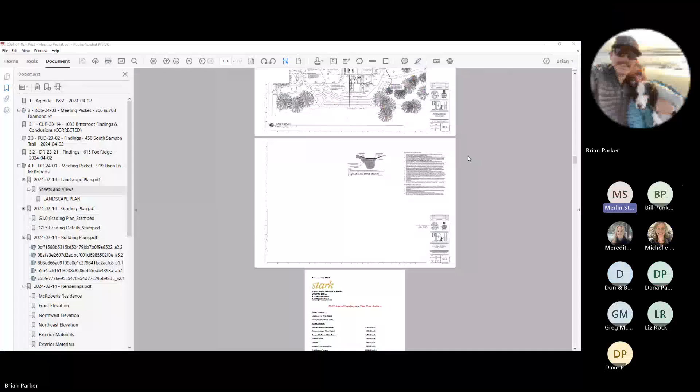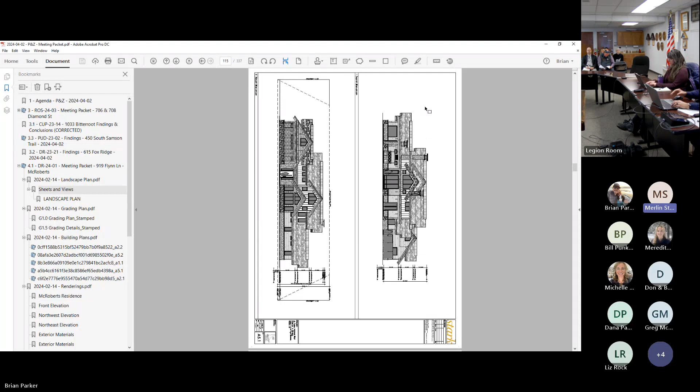We did get comments back regarding the double driveway that we had proposed for the house, and have no problem doing a single driveway into the house. We would like to do minimal landscaping around the house to keep the surrounding area as natural as possible. The only thing we may have is a path leading over to Ponderosa Park. As far as grading goes, I think we've complied with most everything on your grading requirements for the house, and we've also shown infiltration areas for stormwater, as well as snow storage for the lot. I know that there were some calculations missing, and for sure we'll get those to you by the time of building permit. I can't think of anything else right now. Do you have any questions? Commissioners, any questions for Merlin? Okay, thank you, we'll go on to staff report.

Chairman Lyons, this is design review 24-01, 919 Flynn Lane for a single family residence larger than 5,000 square feet. The application was submitted on February 14th, noticed in the paper on the 14th, mailed on the 15th, and posted on the 15th. You guys are going to make a decision on this tonight, theoretically.

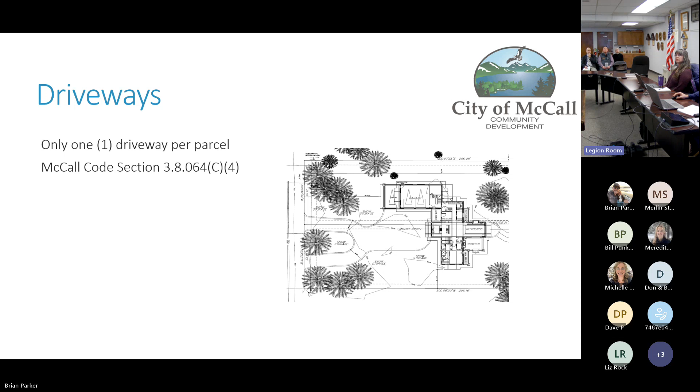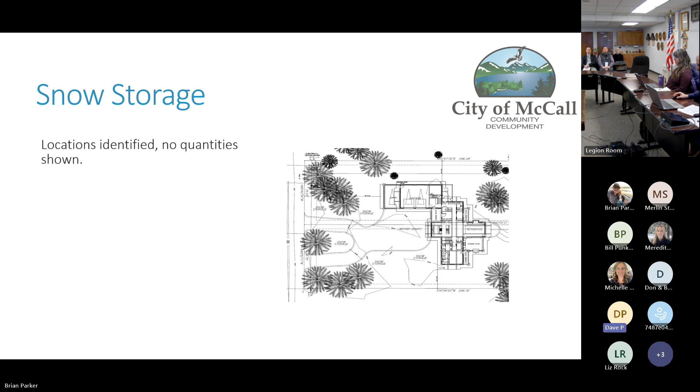From my discussion, there are, like the applicant stated, 2 driveways shown on the site plan. We generally don't allow that unless there's a very good reason to do so. There's conditional approval to remove that. There's plenty of snow storage labeled on here, but they don't actually circle it anywhere or identify the quantities. I'm confident it can work, but they should do the exercise. With that, I will stand for any questions.

Right, commissioners, if any questions for Brian on this one? It seems pretty clear. Yep, a lot of space, extra space. It's not anything too tight, so.

Okay, Morgan. Hello, commissioners. So I only had a few comments on this application. They will need to upsize the existing meter pit that is there. They have a few options for their meter pit, so it's just figuring out if they're going to re-tap the main for a 1-inch meter or use the dual 3/4 inch meter that's up to the property line. They have either option, so it's just figuring that part out on the site plan.

They did submit draft stormwater drainage reports, and it looks like it'll comply with our city drainage management guidelines. There's a lot of room to work with there. There's just a few items that need to be addressed before it can be finalized.

A similar comment to Brian's, just to update the landscaping plan to show the 1 driveway entrance on Flynn Lane. I believe it's on the engineering plans as 1 driveway, so just making it all consistent. And then just making sure their driveway detail matches what we have for our standard details. Nothing too major on my side.

Okay. Commissioners, any questions for Morgan? Morgan, I'm assuming that sizing the water meter and the drainage plan is part of the final engineering approval and the conditions? It is. Any other questions for Morgan or Brian at this point?

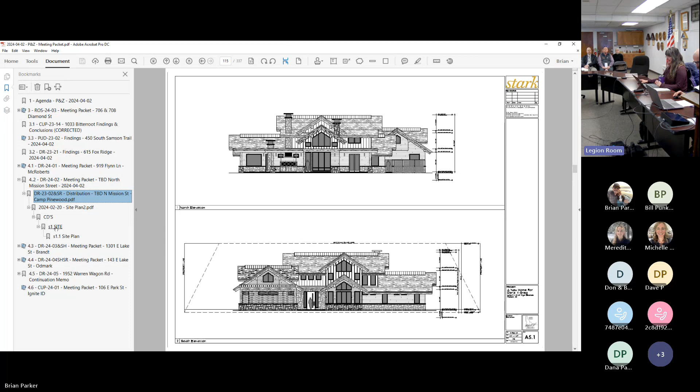I am Kyle Mashik, I'm the Operations Director of Camp Pinewood, and I want to bring to you the Maranatha Activity Center. Their proposed building is a gymnasium, consisting of a building 130 by 60 feet. The gymnasium size will be 100 by 60 feet, with the front 30 by 60 to be an entrance with bathrooms, a nurse's station, coffee bar, and things like that to be added. They are not in the plans because we haven't got that configured yet.

We're wanting to build the shell of the building and the gymnasium currently. We call it the MAC, the Maranatha Activity Center, and it will be an athletic event center providing activities such as basketball, volleyball, pickleball, indoor sports, as well as meeting spaces for not only our guests at camp but also the community. Under our nonprofit status, we are open for educational, religious, or scientific purposes, or any nonprofit activities, allowing us to extend the open times of this building to community activities. Since McCall is in need of large venue areas such as gymnasiums, we thought this would be a good benefit to the community as well.

We are planning a 5-phase project; this is the first phase. We have to build each phase to be complete in itself, with additions to follow. That's why the first phase will just consist of the gymnasium and the entryway with the bathrooms.

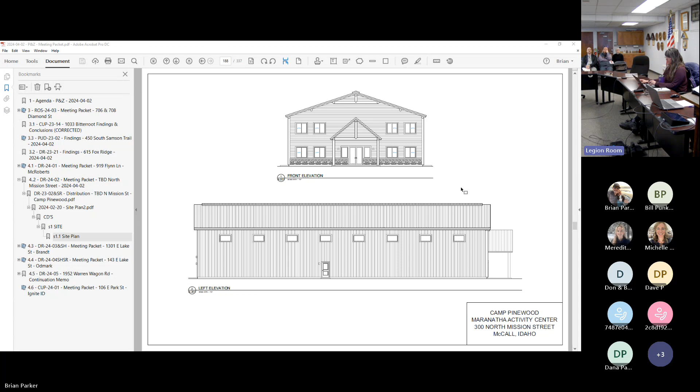It will consist of a metal structure, metal framing. Our plans are to have R&M Steel out of Caldwell construct this building. You can see a building similar to this in Donnelly at Shadow Bible Camp—theirs is a little smaller, but consistent with what we're planning to build. The east facing side of the building will be enhanced with natural elements, such as material from trees removed from the property where the building will be located, as well as some natural stone, artificial stone, and like materials on the east face of the building.

Because the hill this will be built on will have to be leveled, there should not be any need to change the drainage from the building, since it will basically take the place of the hill. The drainage will be a natural flow consistent with our 2016 proposal. However, we will have to enhance some of the impact areas before it reaches the river, to keep sediment from settling, which haven't been improved yet—those will be improved with this project. All the snow will be retained on site, and that, I believe, is what I have for a presentation.

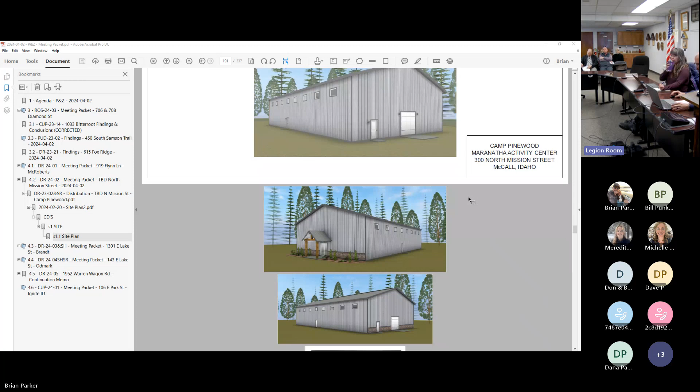Could you pull up a map and show exactly where it was planned? I wasn't quite sure on the maps. It was someone's shop and different things, but I didn't see exactly where the gym site was. I think I know, but if you could point out kind of where it was planned. Yeah, currently we have a shop right here.

This will be 40 feet behind the shop. And then in our 5th phase, because we'll have to build a new shop, we'll remove that shop, put a new shop in, and then this will become additional parking for that facility. The one straight above it is right here. This is the new one, not the activity building.

So it's going to face Mather? Or we're gonna face Mission. Mission, I mean it's facing Mission. So the front of it's Mission. So the sides are within the building. Our additional phases will be off to the side, both sides. We won't be putting any wood siding or anything on that side of the building at this time, because we're doing additions to the building in the near future.

And then you're just doing bathrooms right now, but you're good with the hookups with the sewer district? We actually have been planning to upgrade to a 2-inch line. We currently have a 1-inch line because we have plans for 3 large cabins in the near future. We're currently needing to go to a 1.5-inch line. This will keep us within a 1.5-inch meter, but if we add another cabin, it'll put us into a 2-inch meter. So we thought we should just go to a 2-inch meter right off the bat.

For the water, but you're good with the sewer district with the hookups, you've got everything you need? Yes. With the sewer district, there's the main sewer line right here. So we will be able to come from the south side of the building to that main sewer line, about 600 feet.

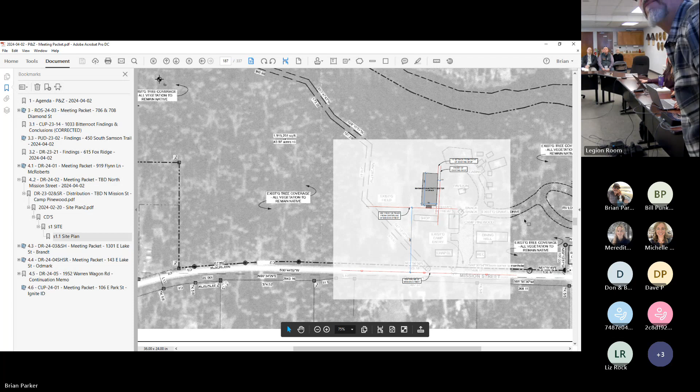This is David. Your drawings show a new driveway coming off Mather. Is that a future phase? No, this is already there. This is an old drawing of what we added to this. So we put that onto that drawing. So that is already there. Mather is completed.

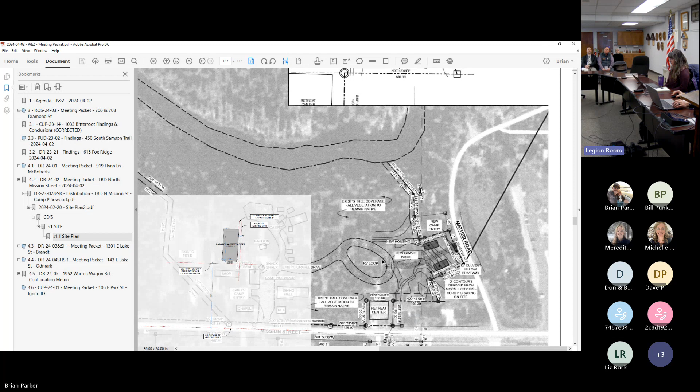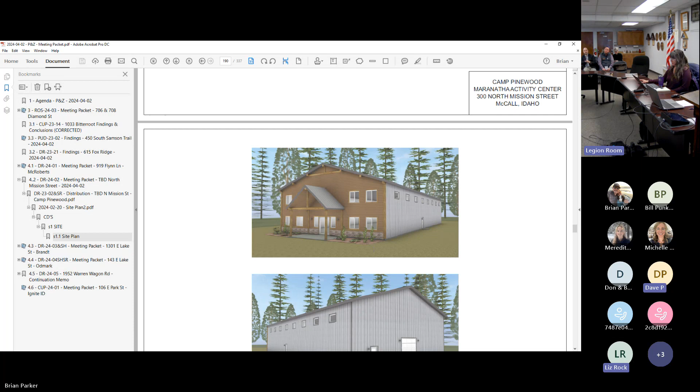Hey commissioners, any other questions for the applicant at this time? Yes, I had a question about parking. I know you mentioned there's a future plan of moving the shop or replacing it and changing out the parking. But for this first phase, what's your plan for the parking?

There is a large parking area to the northeast of this building, and that's an area where we plan to build cabins. So we will have to put the parking in front of where the current shop is at prior to building those cabins. That's why that will fall into that phase, because we have a large parking area now, but it'll need to be moved when we start into those phases. Gotcha, I'm tracking. Thank you.

Commissioners, any other questions? You mentioned that other community partners would be able to use the facility. Have you communicated with Parks and Rec?

Yes, we actually had Mike Wolf out and we walked the project with him, walked the property to talk about the trees that'll be removed and the impact on the community, as well as the possibility of using this facility during the week when we don't have guest groups at camp. He seemed very excited about those possibilities.

We also have one of our staff's spouse who is an assistant teacher at the school district, and the teachers and principal are very excited about having another venue in camp where they could use it. I've also talked to an Association of Christian Athletes director in Boise this week, and he said if they had one more facility here, they would be able to bring some athletic camps to the community, having multiple venues to do those. So he was excited about it as well.

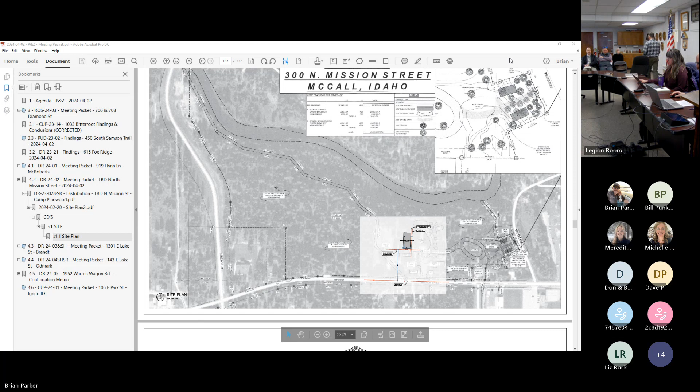DR 2402 and Scenic Route 2402 for TBD North Mission Street for a new gymnasium at Camp Pinewood. The application was submitted on February 20th, noticed in the newspaper on the 15th, mailed on the 19th, and posted on the 15th. You guys are the deciding body on this application.

Hearing and heard from the applicant and engineering. Then there'll be opportunity for public comment, then additional information as needed. Close the public hearing, deliberate, and then make a decision.

This application is for a gymnasium facility of approximately 7,800 square feet, located adjacent to the North Mission Street scenic route. It is substantially set back from that, so not likely to impact the visual quality of the scenic route, but it is there.

It's currently zoned R8. The future land use plan is medium density residential. Again, it's generally in conformance with the comprehensive plan, matches future land use, and a gym, a recreation area facility, is identified on their master plan associated with CUP 17-05. It is at a different location - I'll get to that in a little bit.

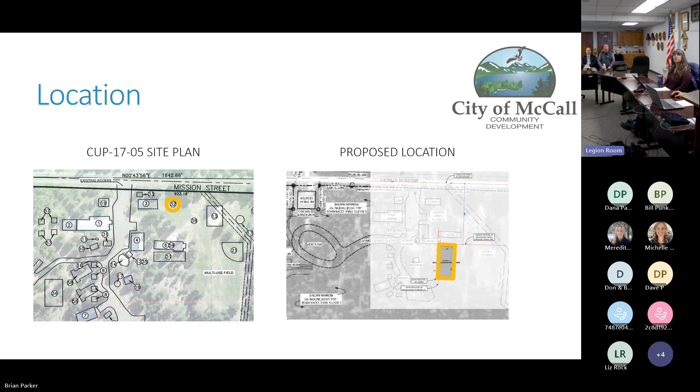Okay, so the one item of staff analysis, as mentioned, the master plan for this camp shows the recreation facility closer to Mission Street. In their planning for this, they determined that setting it back behind the shop on top of the hill was a better location. Seems reasonable and not a substantial enough modification to warrant changing the whole master plan. Generally in conformance with their master plan. With that, I will stay on for any questions.

Commissioner, do you have any questions for Ryan? Okay, Morgan, great. Hello again.

So for this one, I have been working with Kyle quite a bit to figure out the water infrastructure, the water meter sizing. We've come up with a 2-inch meter would probably be best to future-proof this for the future phases, so they don't have to keep going back to the main and upsizing. So we're working on that. I just needed a few more documents from him and I got those in an email. And then they have their stormwater report that was prepared in 2016 that was approved.

And then I just had some additional questions as it relates to this project and some of the grading around that building. That was really all I had, just to make sure it all matches with what's been previously approved.

Commissioners, any questions for Morgan? Not for me.

Okay, with that, we will go to the public comments. Is there anybody online or on the phone that wishes to comment regarding this application? If you're on the phone and you're muted, you may need to hit star six to unmute yourself.

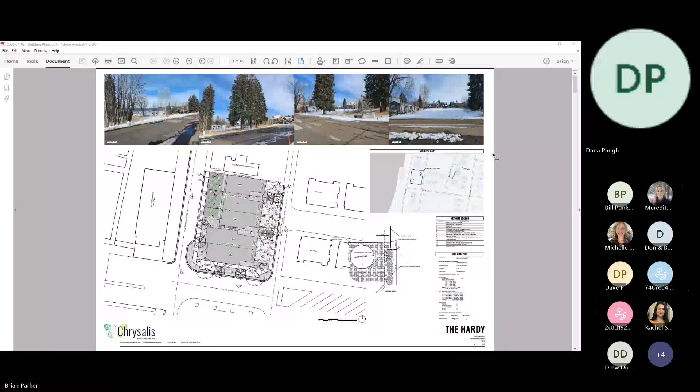Mr. Chairman, members of the commission, we're here today asking for design review and shoreline review of 5 lots between Lake Street and Mill Street, adjacent to First Street. On these 5 lots, we're planning a mixed-use townhome development where the retail spaces would face towards Lake Street, basically facing the marina, which is the lower part of the site in terms of grading. On the upper 2 floors above the retail spaces, we would have single-family residences — 5 retail spaces and 5 residences.

In terms of grading, Mill Street is the high side of the property and Lake Street is the low side. We're anticipating our residential driveways being accessed from Mill Street. Those units would carry all the way through the building, so you'd have the front doors along Mill Street, and then patio and living spaces as you move towards Lake Street.

Our height all complies with the limitations within the zone and the shoreline area. We are fully compliant with all the setbacks. We've worked fairly extensively with staff to resolve how to make these units nice and interesting, providing a pleasant and interesting architectural aesthetic while still being able to capture the views of the lake and whatnot.

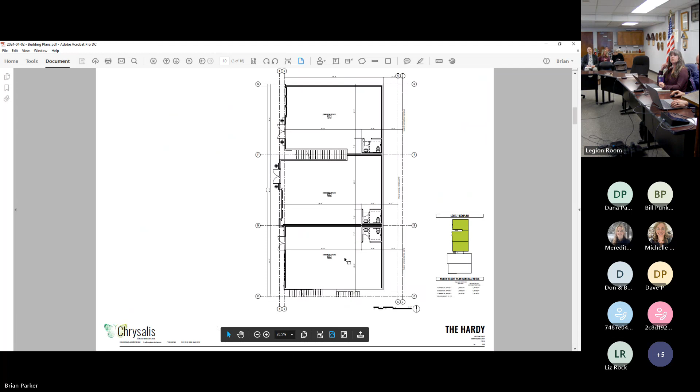So with that, I stand for any questions. I think we've basically complied with all the requirements, worked with staff to try to address all the zoning issues, the setbacks, and the building heights. And we do have a report from engineering that we would end up working through as we get to the building permit.

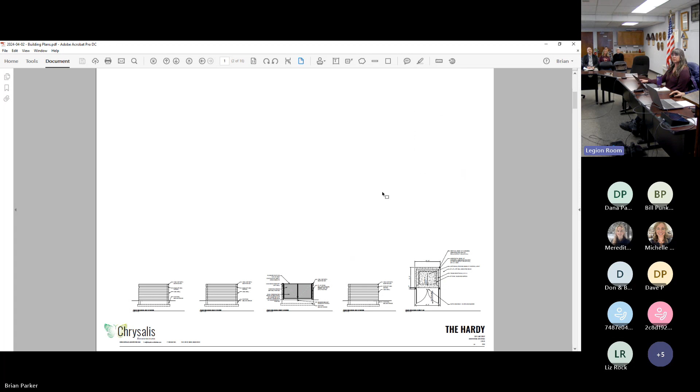Quick question on the upper level where you have the buried propane tanks. It appears, at least in the drawings, you just have the regular cap over them. Is there going to be more to protect it? Because it appears to be right next to and in between driveways, for somebody to either plow into them or drive into them. So the fueling tanks are actually on the lower level. No, not those tanks — the propane tanks that originally had above ground and are now below ground on the driveway side or the garage side, showing propane tanks for each property.

So these would basically be underground and within the landscape area. Okay, but they have the metal cap over top of them that they can open, and it appears pretty close to the driveways. Are you going to have more of something to protect them if somebody's plowing and they're over a little bit? I'm just thinking they'll get torn into. I think that's a good suggestion that we work something into the landscape, and if we need to introduce some wall or barrier there to protect that, I don't see any reason why we couldn't incorporate something along those lines. I can just see people not paying attention and running into them. Even though the tank's safely below, it still could cause issues. Definitely agree, yeah, but we can absolutely incorporate something like that.

What's the plan for where the actual fuel tanks for the marina are? What is your plan to do on top of those? So right now, according to our lease agreement and the way the easement is structured, the concrete has to remain. We can't do anything artificial or superficial over the top of that without agreement between the tank owner and ourselves. So in the short term, we would anticipate just leaving that alone as is, because we don't want to disturb it any more than it needs to be. But around it, we would try to enhance that area with paver systems and things to try to integrate the sidewalk with the adjacent grades and the building elevations.

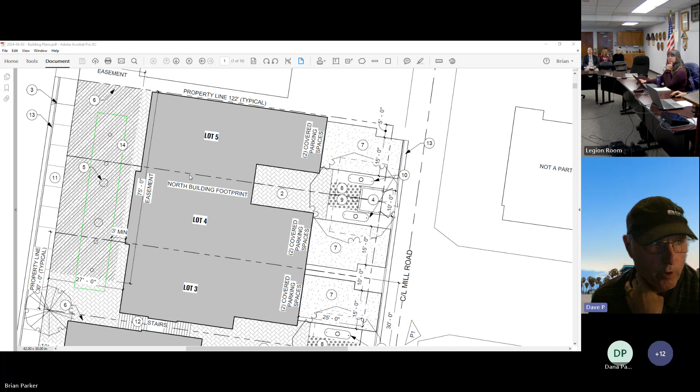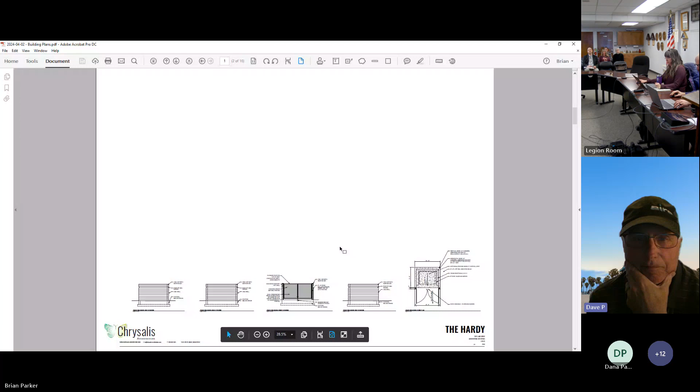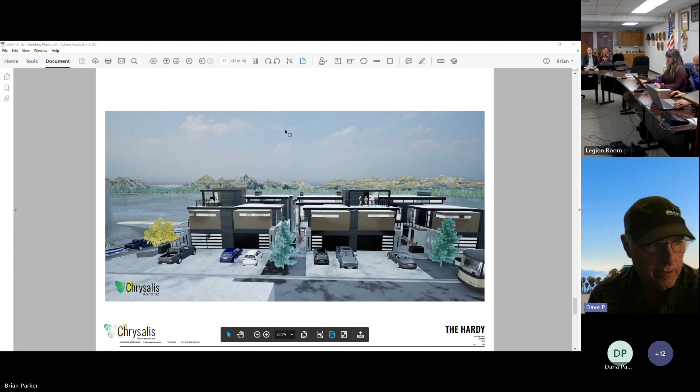This is Dave. Your drawings on page 241 show a plaza over the top of those fuel tanks along with parking. I question how you're going to allow a fuel truck in there to fill those tanks if you don't have some sort of working agreement with the owners. And then there's been a comment on the driveway on the farthest north. Do you have any way of remedying that?

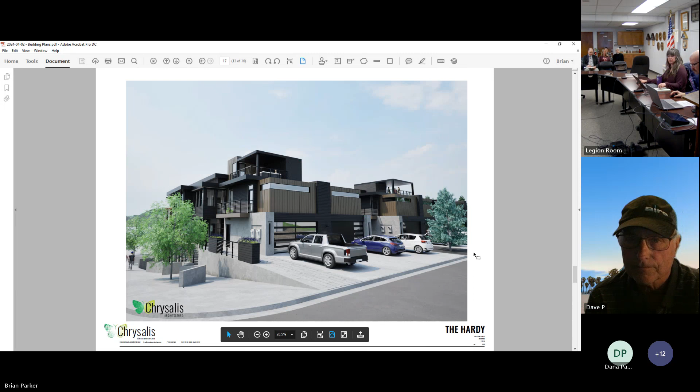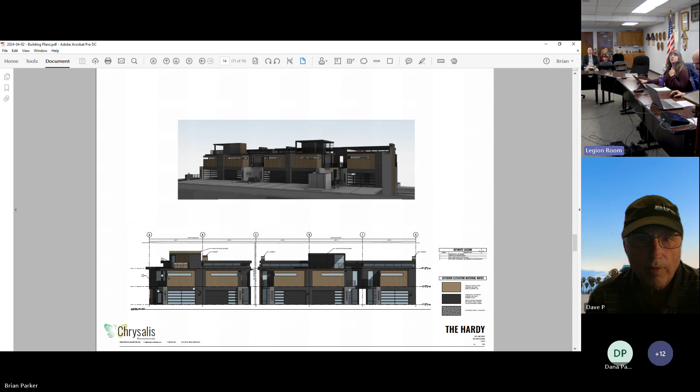Let's go to the image you might be referring to. It's a perspective. Basically, what we're showing is what we anticipate to be the inevitable long-term projection for that plaza. We understand there's going to be some time in between as to when those tanks remain and if they get removed, but this is what we envision for the finished version of the plaza.

In the short term, however, along Lake Street, there's parallel parking that's going to be provided, and that's where the discussion with the tank owner comes in - we would allocate a certain time compatible for both of us to figure out when those tanks need to be fueled. The proximity to those tanks and where that on-street parking would be would absolutely accommodate the needs of being able to fill those tanks up.

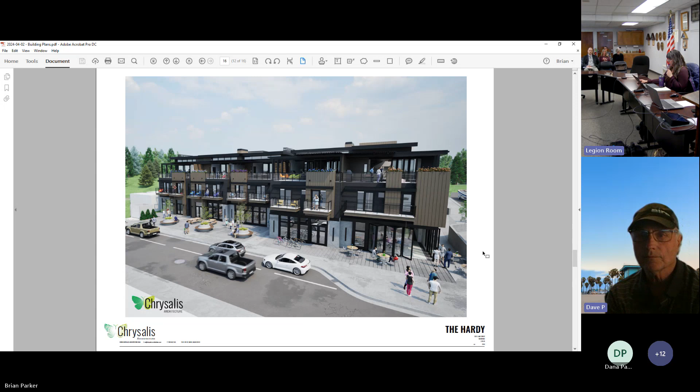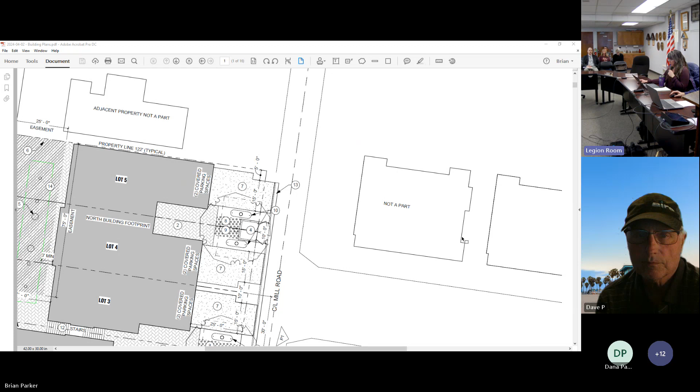And then, what was your question about the north side, Commissioner? The driveway on the farthest north appears to be too close to the setback. Who revised it? I think we have since revised that from maybe something you've seen that was a prior version. In one of our initial concepts, when we submitted the application, we had driveways that were a little closer together and didn't provide the necessary separation. I think we've since satisfactorily addressed that, at least in our workings with staff. So unless there's something I'm not aware of, I think we're okay meeting the code requirements with the driveway design as currently proposed.

Maybe Brian can comment on that a little bit. Yeah, we'll let Brian update us on that.

It's helpful to have drawings that are actually what you want to build sometimes.

All right commissioners, any other questions for Richard at this time? Yeah, I do have one. What's your plan for snow storage?

So in between all of the lots, we have designated the snow storage areas. And then I also think we're making some contribution to having it trucked off site. But we are allocating some of that snow storage on site currently.

Any other questions, Richard? It looks like... oh, go ahead. Your drainage basins are all on the Mill Road side, like water's gonna run uphill. How's that? How do you intend that to work?

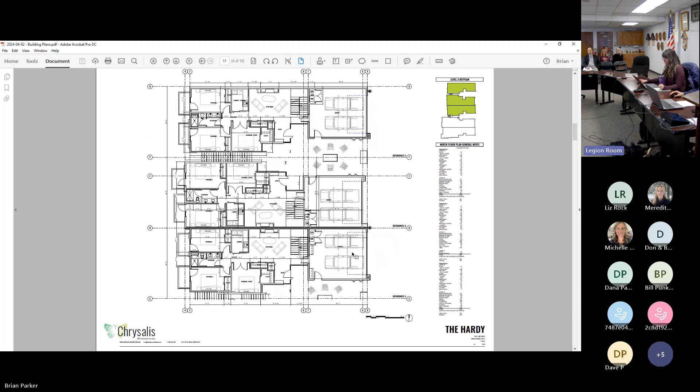No, Commissioner, actually we have two sets. We have drainage on the north side, on the Mill Road side and on the Lake Street side. So there would be some drainage on the lower level, really in the areas where the tank is not, and as we're providing the appropriate separation, that's really the intention for the pavers themselves, is that they act as a storm drainage and retention area.

But you're showing that over the fuel tanks again, right? Again, we're showing that in such a way that this is what we anticipate for the future, long-term vision. Right now, given that the tanks are there, we have enough area and we're using as much area as we can for the snow storage outside of those. So anything added later on would be over and above what would be required.

I guess I'm curious why you think the fuel tanks are going away. Well, there's a lease in place, and the marina might not always exist in its current situation. And even if it doesn't, our project has accounted for those tanks remaining in place outside of any of the planting areas that are placed on top of it in what would be our final version of the site. Okay, I really don't see the marina going away, but we'll let you go on with that.

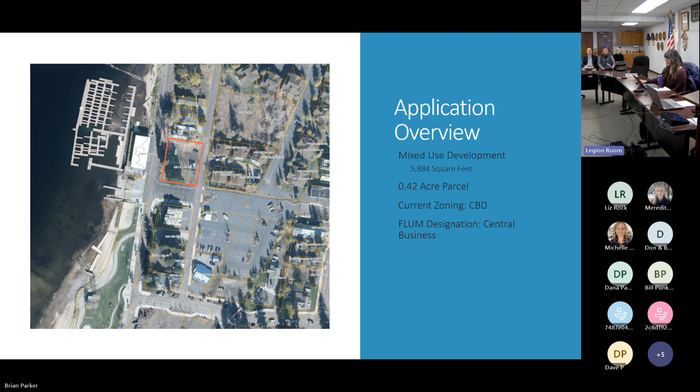The commercial zone has specific design review standards that we'll go through. It's required to be at a pedestrian scale. The buildings have variation in the wall planes. There are 2 different buildings. The larger building includes a stairway access point from lake to mill that will break up the facade a little further and keeps pedestrian scale.

Includes some balconies. There's quite a bit of variation in building materials. The larger building is set back relative to the other. I've been kicked out of the meeting again.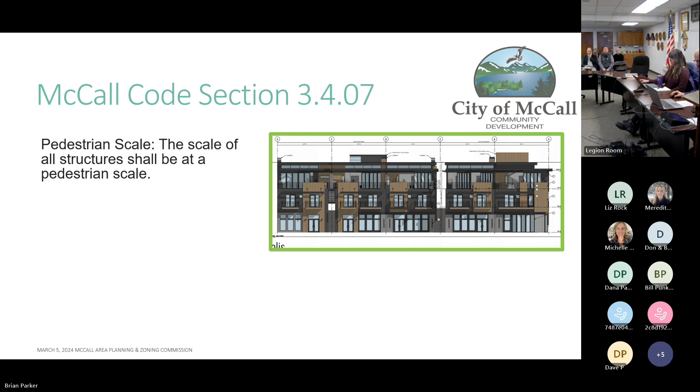And got pedestrian oriented street front, or storefronts, I should say. All the storefronts are less than 25 feet wide. There's one that has 2 storefronts adjacent to each other, roughly 50 feet worth of space. There's substantial glass on all the storefronts.

There's some obvious front doors of the buildings, particularly the ones that include the wood elements around the doors to highlight the entrance.

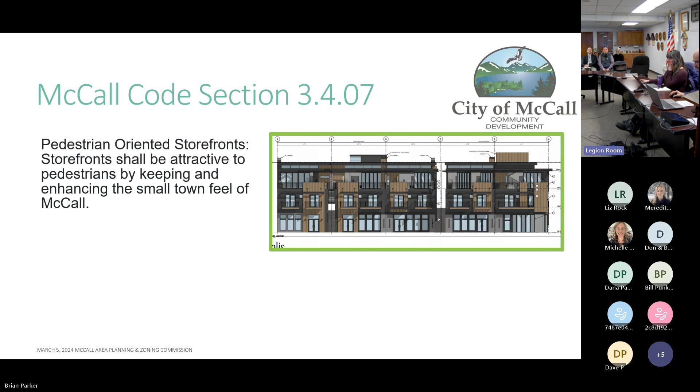The requirement is for styles consistent with the McCall area. This one is a little bit more modern, a little different style than what you would typically think of as a traditional McCall style. It does, however, incorporate substantial wood and stone elements into the design.

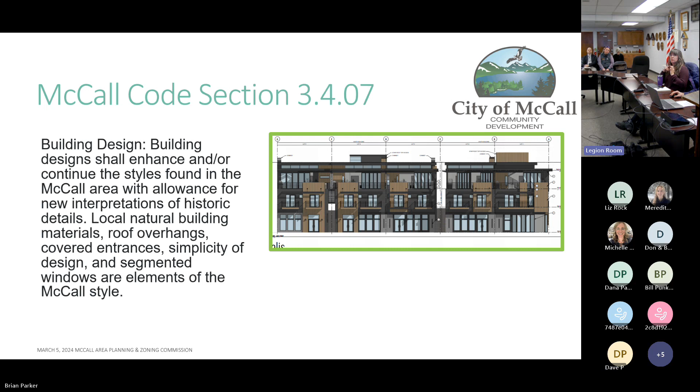Has covered entryways, balconies on the 2nd floor, a flat roof to retain snow. I think it's generally consistent with McCall style, although it is, like I said, quite a bit different than what you would typically expect. The snow country design again has covered entrances and a flat roof to hold snow. The actual snow load requirements are determined at time of building permit.

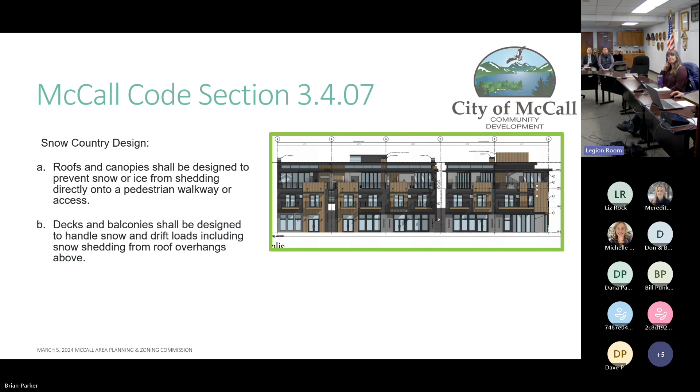There are no harshly contrasting color combinations or blank walls. So then the general design review standards, it matches the comprehensive plan, zoning, and future land use map. It's infill, it's mixed use, includes pedestrian improvements. Again, there's nothing that is likely to jeopardize health, safety, or welfare of the public. It conforms with applicable zoning requirements as conditioned.

The project will have no substantial impact on adjacent properties or the community at large. It is what has been envisioned for the downtown area for a good long while, and what was expected within the shoreline and environment zone. It will be unlikely to have unreasonable impact on visual quality or the water quality. It is an improvement on an unimproved dirt parking lot. It is not directly on the shoreline, it's set back, and stormwater management practices will be required to be followed.

As discussed earlier, the plans in your packet had the northernmost driveway right up against the property boundary. There's typically a 5-foot setback requirement. It appears they have made some modifications based on the plans presented by the applicant.

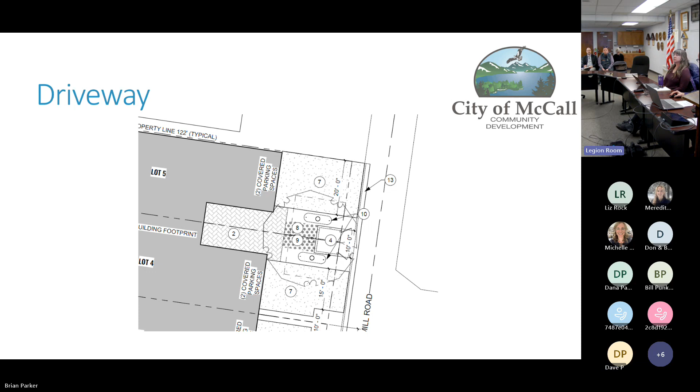Fuel tanks, as discussed, there's a 75-foot by 25-foot easement area for the fuel tanks. The building nearest is supposed to be set back a minimum of 3 feet from wherever the actual location of the fuel tank is, or outside of the easement, whichever is greater. We don't know the specific location of the fuel tanks at this point. We've been working with the building official and fire district to make sure that when it comes time for a building permit, those are located and the correct precautions are followed.

There is a condition of approval to develop an operations and maintenance plan between the developers of this property and the easement holder, which is Mile High Marina, so they can agree on how it would actually be fueled, what times of day, what street furniture and things like that can be placed on top of the easement area, and so on. I intentionally left that condition fairly vague. If there are specific items you would like addressed, please motion.

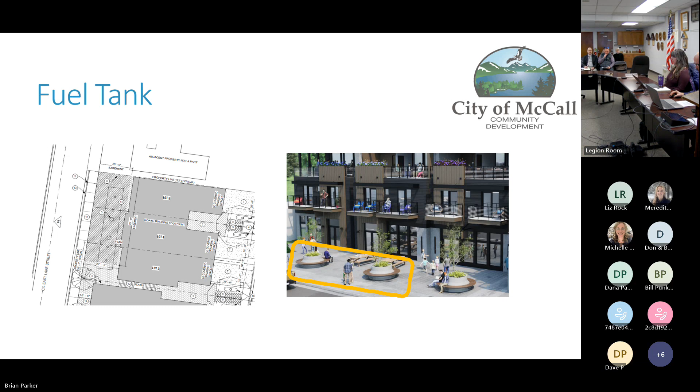The applicant has indicated that the original 5 parcels from the McCall first addition plat are still valid and that this has been combined for tax purposes. Entirely plausible - we just want to see a title report to verify that, or some documentation.

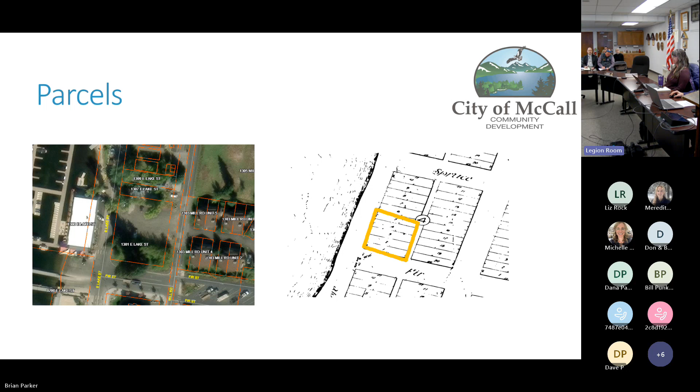Snow storage is required at roughly 2,500 square feet, and they have identified roughly 400 square feet - on these very dense types of developments it's just not feasible. We have options for them to provide documentation that it's going to be trucked off and stored elsewhere. So there's the condition of approval: they either figure out some storage on site or provide documentation that it is going to be handled elsewhere.

The bicycle parking, they have identified adequate short-term parking, but need to show 3 more long-term bike parking spaces. That I will stand for, for any condition or question.

I know they're doing the sidewalk there - there's several homes between that and the glass house. With that getting closer, is there any thought of doing any more along there? Yes, we have been taking these on one at a time and getting escrow agreements between individual property owners as they develop, or construction is up to the developer.

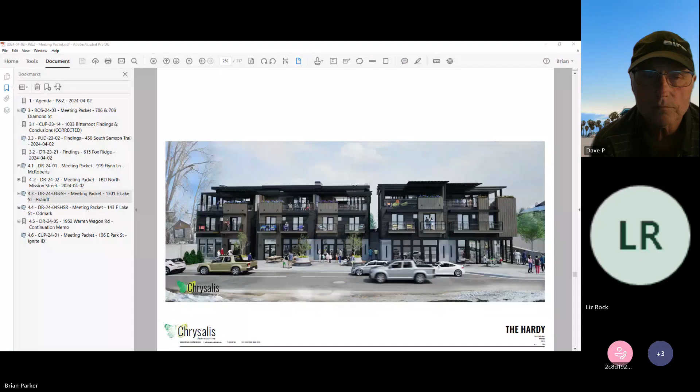The building height is the more restrictive of finished floor elevation or pre-construction grade. This flat dashed line is finished relative to finished floor. This sloping line is pre-construction grade. Gotcha. So there's a chimney here and then it's stairway access.

All right, commissioners, any other questions for Brian at this point? All right, Morgan. Well, before we do, sorry, I was late on the mute button. I have a very silly question.

As you can see in this elevation right here, they do have a sign. Does this application include that signage or would that be approved separately? That's a good question. I typically put in a statement that no signage is permitted with this application and will require a future sign permit application, but I failed to get that conditional rule in there. So they're adding that as well. Thanks.

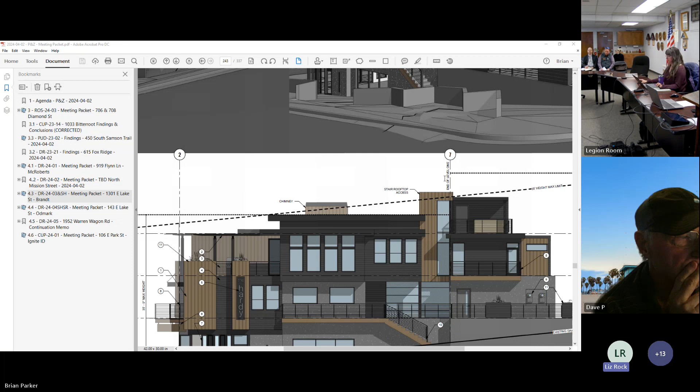But by not mentioning it and having no sign plan, there's nothing there.

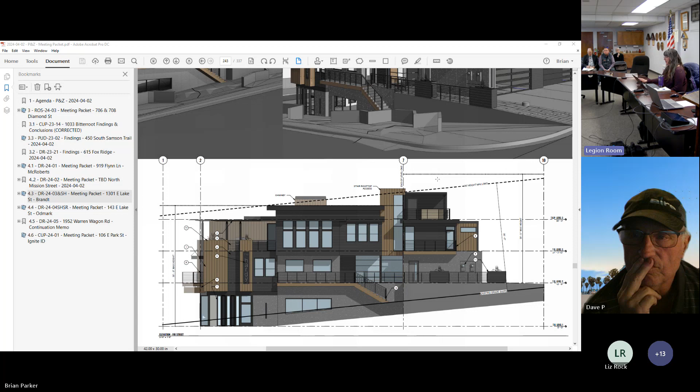All right, Morgan. Great. Hello again. So we've reviewed this application and I sent out my engineering review letter. It's about 3.5 pages of some items that we need to work through. There's 3 major items that I think are kind of risky to get entitlements before, just like some of the other projects that we've seen that are larger in scale.

So the hydraulic model hasn't been completed right now. It has been initially completed, but further input from the fire department and our consultant team is needed. The initial assessment does identify that improvements to the water mains will be warranted to achieve the required flows and pressures that we are assuming at this point in time. So that'll include building a main in First Street to connect Lake and Mill and upsizing the Mill Street water main, but that length hasn't been determined yet. So that's one of the inputs that I'm waiting on. But there will be some water improvements that need to occur.

They did submit a traffic memo and it's pretty general, but it's kind of hard to account for traffic impacts in a more urban area. That's our pedestrian zone for Lake Street. So we still have a few conversations, I think, on that and regarding Mill Street in general and its condition and how it'll fare through construction of this. And if they're building water mains, what that looks like for that pavement section.

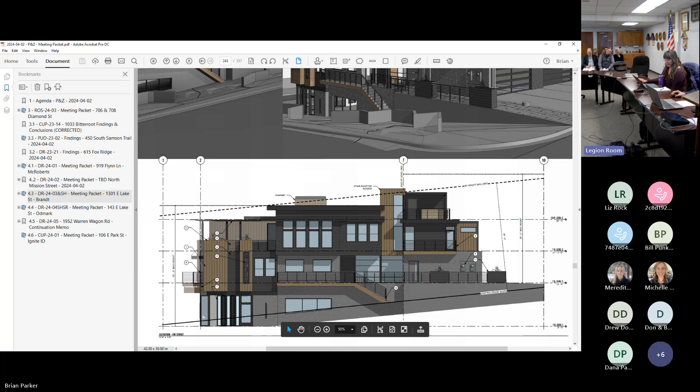From what has been submitted, the stormwater design does not meet our drainage management guidelines at this time. Commissioner Petty pointed out that there's some drainage basin items, and some of those were part of my concerns as well. There is a large drainage basin on the east side of the property along Mill Street, and the narrative explains that it's the roof drains that'll drain into that basin, but it does not propose pre-treatment for the drivable surfaces or the plaza areas. And it's just to follow the historic flow, which we're not okay with right now. It needs some kind of pre-treatment because it's so close to the lake, that storm system, and verifying the storm system has capacity for these increased flows.

This is also a pretty large drainage that comes through here. It's basically all the drainage you see outlets here. So confirming that it's sized properly for that acreage. Those were a few of my high level comments, but I think it can all be worked through. But just stating it's risky on their end to get some entitlements before having some of these larger picture items considered and figured out.

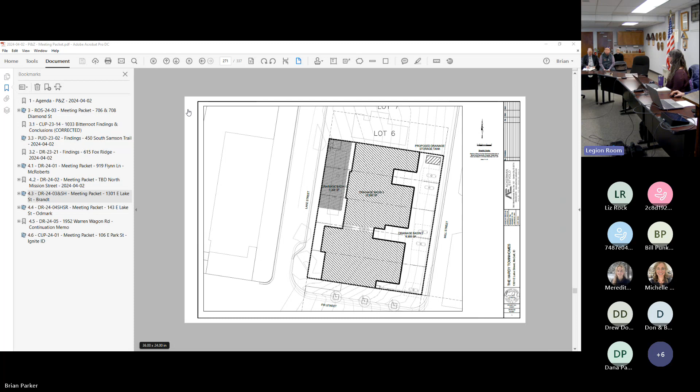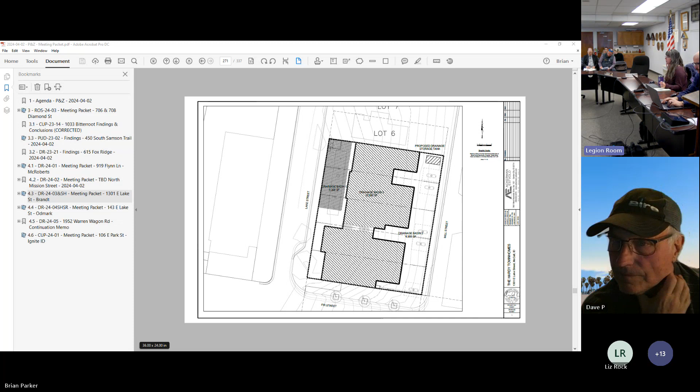I noticed we had some kind of late comments coming in from the fire department that required a sprinkler system. Yes. So that'll be part of that hydraulic model, identifying what they need for those pressures and flows for that internal fire suppression system. And that's in my report also. And then verifying with the fire department if 1,500 gallons per minute from the fire hydrants are sufficient, or if it needs to be 2,500 gallons per minute for the mixed use. I know for some of the mixed uses, we try to aim for that higher gallons per minute just so that there's more water and pressure available for these projects. And just verifying what they're comfortable with, since there are quite a few hydrants around.

Pull it out of the... Yeah, and they'll have some fire suppression on the interior, so figuring out that balance and what that'll look like in the water model. They did have in their plans fire sprinklers already, correct? I thought I saw that in there. Pretty sure I did, didn't I? Yeah, that's what I thought. Okay, yep, but just getting those flows and pressures confirmed, to make sure that they're supported adequately.

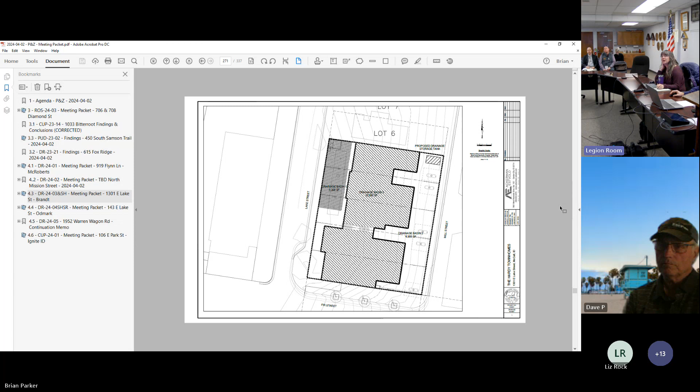You mentioned that the drainage from Woolley comes through here. Where does that go, and how does it reach its outlet? Do you have an aerial map, like a satellite view? Just generally, is it north of the property?

I believe it starts in Spring Mountain Ranch and comes down to Woolley, and then has that channel on the south side of Woolley that meanders to the north side on those undeveloped properties at Woolley and Davis. There's also a pedestrian pathway through there, which is also a drainage easement.

Brian's gonna pull up the stormwater layer. I just didn't know where the outlet was for it. So it's all connected there, and then we have a system of stormwater pipes through the improved First Street, Greystone Drive, and McCall Avenue. That stormwater pipe is connected on the north side of this property, which was one of my comments, to show that stormwater pipe.

So making sure it all meets the requirements of the drainage management guidelines. There's some outlines in there depending on the drainage size, how large the pipe needs to be, and what size of storm it needs to accommodate.

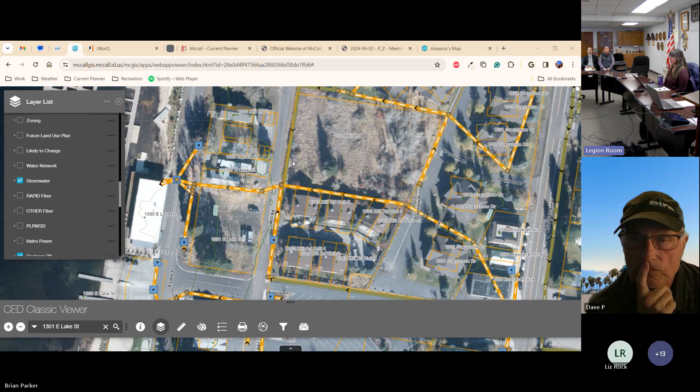And you guys haven't had those discussions yet, I'm assuming? Not yet. This is kind of a new area for traffic studies where it's built out, but more pedestrian focused, unlike other projects we've had in the past. Thank you.

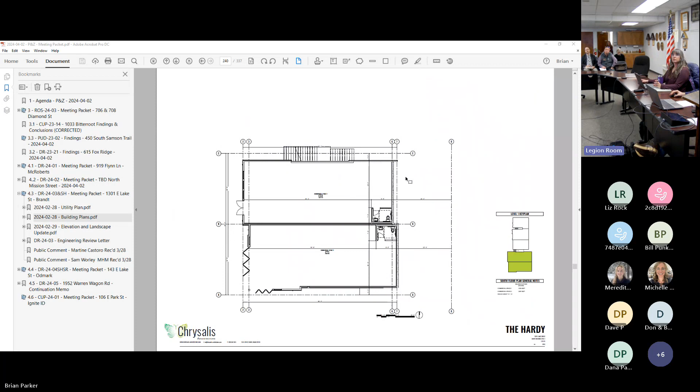I've only got 3 minutes. The other thing is on the shoreline environs, there's quite a bit written about not having wall-like structures, either from the water or for people on our side who have views of the lake or looking toward open space. On our side, we're looking at a wall of garages, the 2nd story, and then the 3rd story with stairways up. If there was some way to still allow them to build, but maybe make those stairways bigger or shrink the structure, it's very wall-looking. From our end with the garage, the views they have are up high, like where a crow would see it. If you're actually down where we are, these garage fronts are going to be quite oppressive and appear like a wall.

I think this application is premature and not ready, and my request is that you reject it.

One last thing for planners, and I know Michelle's on the line: Mill Road has turned out to be a fantastic pedestrian way. Right now there are no sidewalks, and that actually allows people to use it as a pedestrian way. They walk 3 and 4 across with strollers and bikes. It's a wonderful amenity because cars automatically slow down. As soon as you put in curb, gutter and sidewalk, that's the 2 feet allotted to pedestrians, and cars start speeding up. So as you're looking at Mill Road and parking, if you haven't spent time there in the summer, go hang out and see how people use it as a great pedestrian thoroughfare. I'd ask you to keep that in consideration as you look at plans for sidewalks. That's all - perfect timing.

Is there anybody else here in the audience who wishes to comment regarding this application?

Is there a last call for anybody online or on the phone who wishes to comment regarding this application?

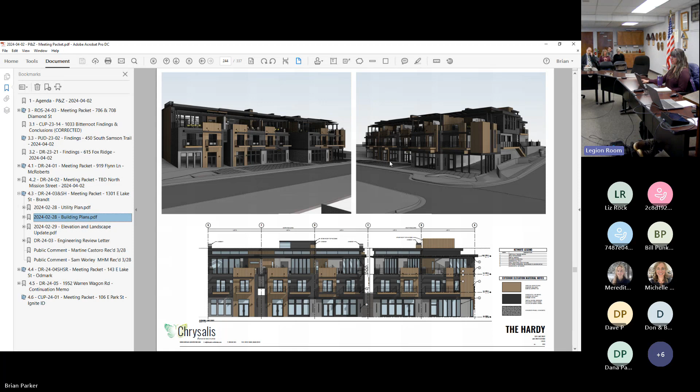On the residential side, on Mill Street, there was a question early on by Don Gray about the actual height. We've reduced the height along the Mill Street side because of the slope of the site. So on the low side of the site, the building appears taller toward the marina, but on the residential side, all of these are just above the 20-foot mark. There are some areas where the stairs, as an exception, allow us to extend above the 35 feet, but only by about 2 feet for the stair area. Everywhere else relative to the buildings is well below the 35-foot height limit on the Mill Street side.

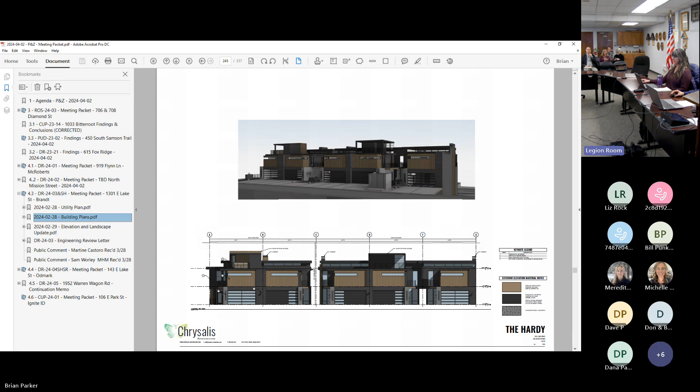In terms of access and parking on Mill Street, the intention is not to have any on-street parking on Mill Street. All the driveways and garages would accommodate the necessary parking for the individual residences.

As far as the traffic study, the point made by Morgan, I think, is an important one, because we have these conditions. If these conditions aren't met, then we don't have the entitlement. So allowing us the ability to continue working through some of the very specific things relative to studying access at the marina, those are expensive exercises that really are difficult to continue without knowing that we actually have a project to work through.

Understanding that we absolutely have full intention to comply with all of the engineering requirements, we think that the reality that we're providing a better system around this property as a result of this project should be commended, simply because we're making the system better with this project.

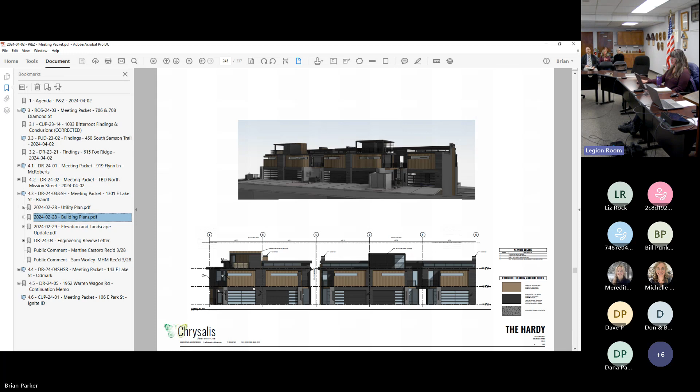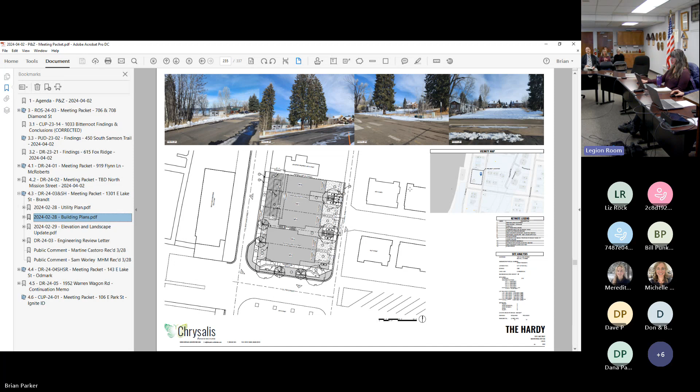As far as the exchange around the tanks, we know exactly where the tanks are. They're shown on our site plan. As a matter of fact, the tank as it's shown right now extends beyond the easement. If we so felt like it, we could ask them to remove that part of the tank. We're not going to do that, but the reality is, this is where the tank is located, and it's not within the easement.

We are providing all of the appropriate separations that are necessary for code requirements and regulations for construction around fuel tanks, and the structure is not imposing any additional impact to the tanks themselves. Again, we have every intention of working with the tank owner to make sure that that issue is resolved, but that's not the issue at hand as far as I'm concerned.

What we're here for is the design review portion, and making sure that we're requiring and addressing all of the engineering necessary to accommodate our buildings and our proposed design. With that, I would stand for any questions.

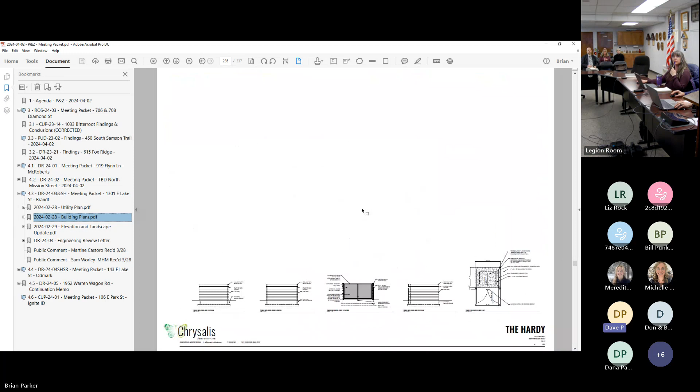Just to answer one of the public questions, I'm sure you're not anticipating any real curb or sidewalk along the Mill side at all. Yeah, there is. It's not just your driveways. It's curb and gutter, and then sidewalk through. So there is sidewalk along there. Okay, it didn't look like there was on the picture. Yeah, maybe a little bit of a curb, but not seeing any sidewalk.

No, you had it, Brian, back. Oh, so you have it on that, but not on the artist rendition or the picture. It might not have got incorporated into the rendering. But yeah, there'll be sidewalk around all sides.

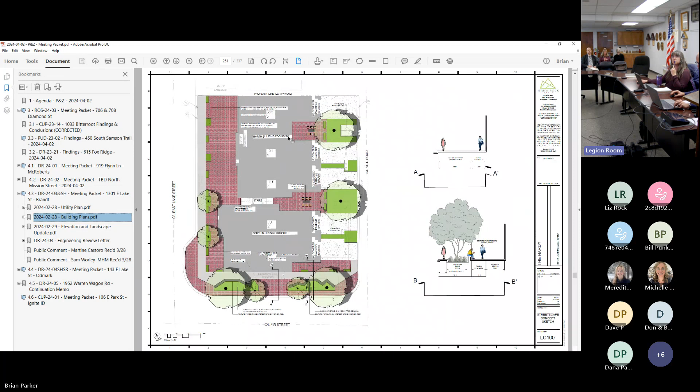On the tank, since you have the easement showing 3 feet from the building, correct, as far as the easement? That's right. So what's the distance from the actual walls of the tank to the footing? So we have a site plan with a little detail. Yeah, I saw that one there, but I don't see if it showed the actual distance from the tank. The way that I read it was that it was 3 feet from the tank, not 3 feet from the edge of the easement.

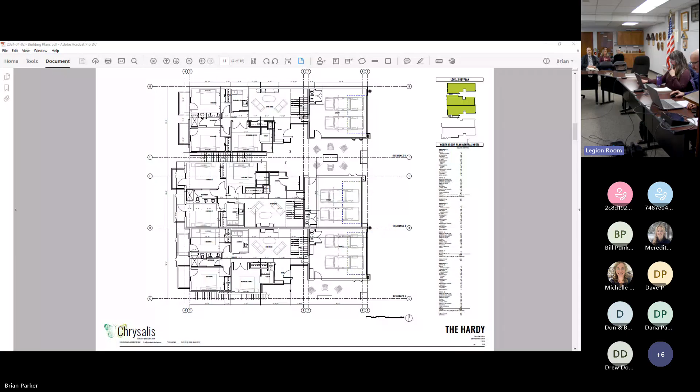We added a detail just to clarify this, Brian. So a 10,000 gallon tank is going to vary in size with diameter and length. This is generally considered the largest size for that gallon capacity. Right now, we have at least 6 feet. We have 5.5 feet to the sidewalk or concrete pad over the tanks. And we believe the size of that concrete is actually 12, so there's actually another foot from the edge of that concrete to the tanks themselves.

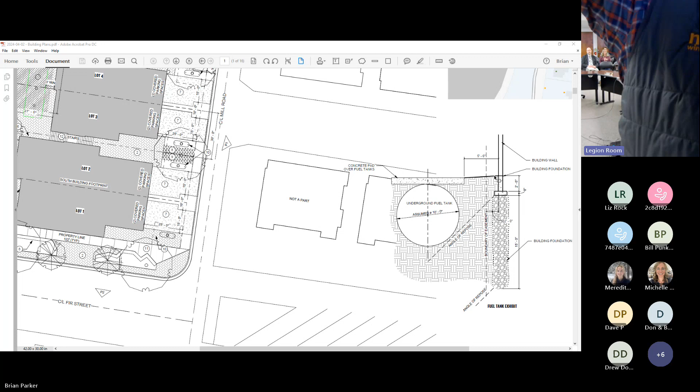The building structure is basically on geopiers, like structural sonotubes that go down into the ground to support the perimeter stem wall and footing. There are 2 conditions analyzed for the structure and the bearing capacity of the soil: from the point of the structure, there's an angle of repose, which represents the implied load of the structure on the soil. The load doesn't go sideways, it goes down at a 45 degree angle. So even in our worst case scenario, that angle of repose doesn't touch the tank. Anything above that line isn't impacted by the structural load of the building; everything below that line is.

So that diagram basically says exactly what I've been saying, that the structure doesn't really impose any additional load on those tanks.

Excavation will absolutely. What if that tank is 12 feet wide? It's not 12 feet wide. Your drawing says assumed, I'm just curious how you know that for certain. Because if it's a 12-foot wide tank, the gallons provided in that tank are larger. With that size of tank and the gallons accommodated, a 12-foot diameter tank doesn't have the capacity to support the amount of gallons it would incur.

It could be larger though, right? And still, if that's the case, then we've got a much bigger problem that the tanks aren't regulated properly.

Do we know exactly what the size of the tanks are? We do. We have DEQ reports, everything is absolutely identified as the size of those tanks, and the shape. I don't have any of those reports in our records, so they exist elsewhere, in Idaho Department of Environmental Quality. And the owner of the tanks has access to these as well.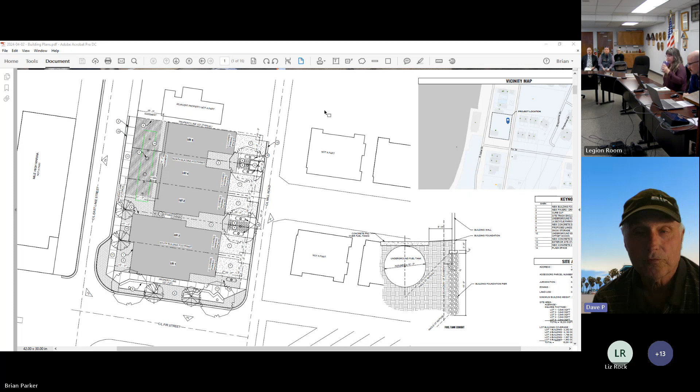So my question then is, who owns the tanks? I believe the marina business owns the tanks and is the grantee of the lease and easement agreement. The city is not a party to the easement. But Steve talked about a lease through 2024 for that piece of ground. The subject property is currently leased to Mile High Marina to use for parking. The city is not part of that lease agreement either. Okay, that clarifies that for me. Thank you.

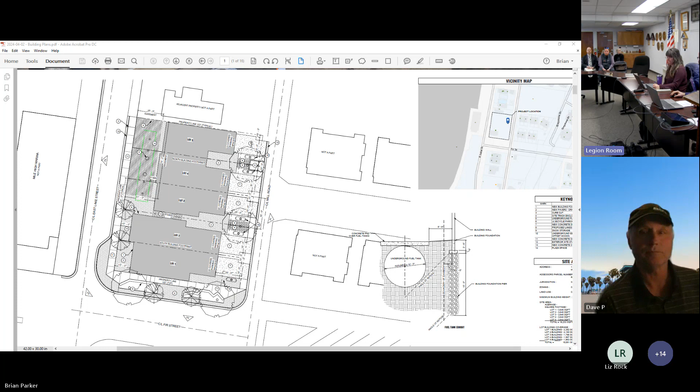Brian, earlier you said the height restriction was exceeded in two minor areas, but it was allowed. Is that what you said? Because certain things are allowed within that. The code defines building height as measured vertically from any point on a proposed building element to the existing grade prior to construction or finished floor elevation after construction, whichever is more restrictive, directly below that point. It's the highest to lowest measurement at any given vertical structure line, per the handy diagram. Excluded from the height measurement are approved antennas, roof stair access enclosures, projections, cupolas, chimneys up to 10 feet above the highest point of the roof surface, steeples, and spires. So they're specifically excluded from that.

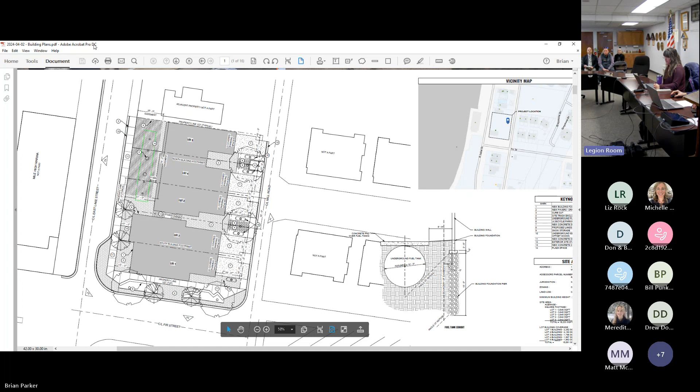I want to go back to the fuel tanks. Seems like we've had a bit of discussion and disagreement here about where they're located potentially, and also the size of the tanks. At the moment we just don't have any information to actually zero in on the correct answer. I think that is a correct analysis.

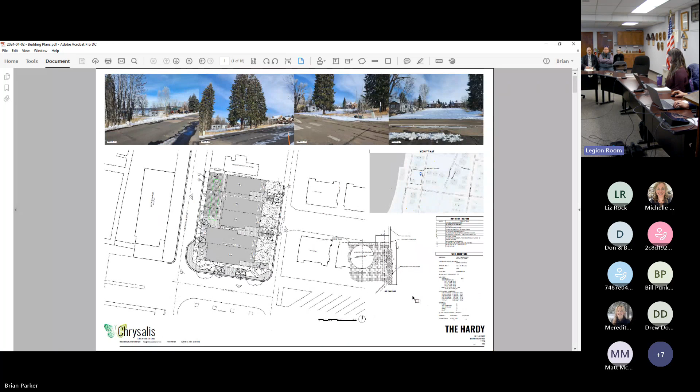Morgan, in your review, was there any part of this that would involve a development agreement with the applicant and the lease or the tank owners, or would you not be a party to that, as far as their timeframes of fueling? I don't think the city would need to be a party of that. I do have a comment that if they need to provide vehicular access to the tanks for fueling, they should add it to their plan so we know where it's being constructed. But I think that's as far as we would need to know.

Would we need anything that says we'd ask for something in the CC&Rs so the owners of the buildings are aware that fueling will be happening at times, and there will be fuel smell, so they don't call the city and complain? That might be a Brian question. Yeah, I think that could potentially be a condition of approval, to provide an updated easement agreement with language regarding fueling, and also incorporate that into their plan.

I know they mentioned this, and I don't know if it's normally part of our conditions, but is this handled with the building permit as far as bonding and stuff with the tank? Do we make sure there's some kind of extra safety or precaution beyond just engineering, or do we need to specifically call out extra protection for these tanks? I think you could add something into the construction management of the project. When there's a larger project like this, we usually require a pre-construction meeting with staff and utility providers, so that would be a topic to touch on there.

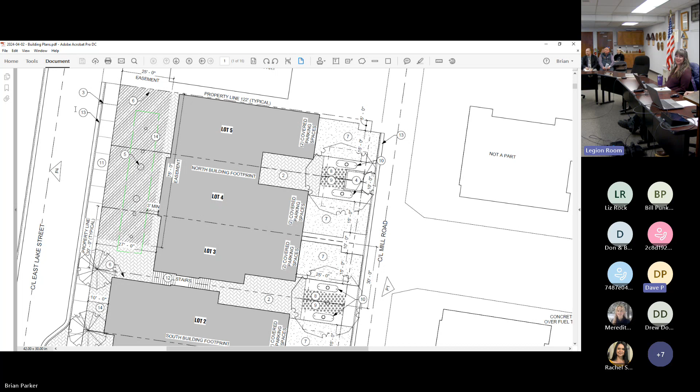Very good, so we'll go ahead and have commissioner discussion. I guess in my mind, it seems like there's still a lot of uncertainties here that I would like to see a little more clarity and details on before feeling comfortable moving forward.

You know what those are: the stormwater plan. I had a note in here about mitigating possible pollutants. Hydraulic modeling sounds like that's in progress, so maybe not a terrible thing there. But the one that really stands out to me is the risk and the tank locations and the tank size and how all of that plays out. Before I'd be comfortable moving forward, I would like to see some clarity there and some details.

I completely agree with that. I think protecting the lake is crucial. So stormwater design, and we need to see specifics of the gas tank before we can move forward. So yeah, I agree.

Dave? Yeah. I understand that it's easier for a developer to go forward when he has an entitlement, but there are too many questions. I'm still not clear. So even if the lease for the tanks goes away, then where do the tanks go? There's a lot of questions that I think the developer and Mile High can answer for us, or at least clarify.

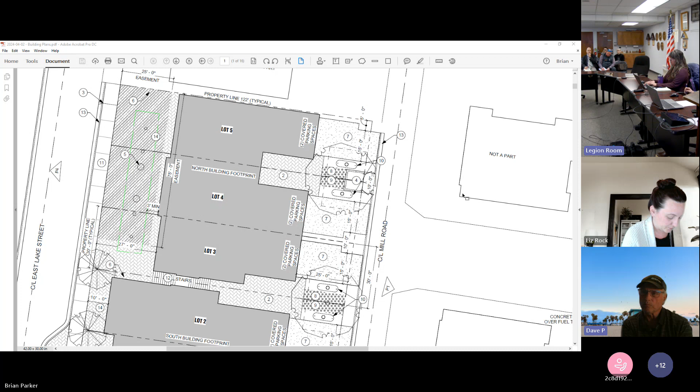And I think a lot of what you had, Liz, also kind of falls in with the potential bonding liability, as long as they're under the construction agreement. I think that falls in with there.

So with what I'm hearing from everybody, I think we're all in agreement that we would like to see this carried on. The question would be, would it be able to be done by our next meeting, or would this need to push out farther? It seems like they're trying to work it pretty good. Unless they state otherwise, I think we could give it reasonably on the next meeting.

Okay, and the applicant seems to think they could do that. I mean, I think we don't have to give any specifics. I think the applicant and staff know our thoughts and concerns. So I make a motion.

Well, any other discussion? Sorry, before I do anything. I know we don't have a lot of snow, but is a month enough to get information on where that stormwater drain is? Or do we need to wait for more snow?

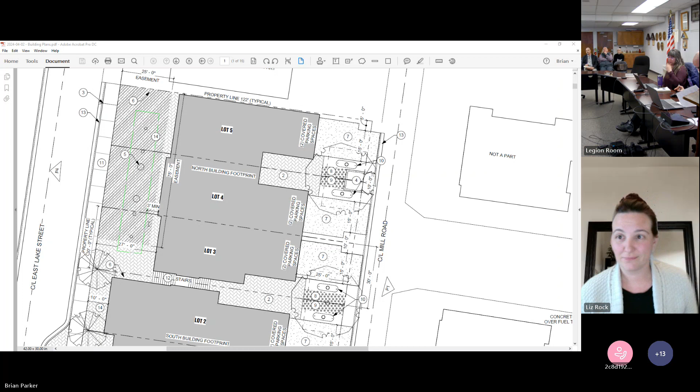So Brian, finish the roll call. Chairman Lyons, yes. Commissioner Kinzer, yes. Commissioner Rock, yes. Commissioner Pa, yes. Commissioner Petty, yes. All right, that motion is approved. We'll continue it to our May 7th meeting.

All right, next item, design review 2404, shoreline 2403, and scenic route 2401, has requested to be continued to the May 7th meeting. I make a motion that we continue that item to the May 7th meeting. Second. All in favor? Aye.

All right, next item, design review 2405, shoreline 2402, and scenic route 24 — cut off. 24 something. We added that. So many clerical errors in this one — shoreline 1 and 2 are swapped. Okay, so it's design review 2405, shoreline 2402, and scenic route 2403.

That also has been requested to be continued to the May 7th meeting. So I make a motion that it be moved to our May 7th meeting. Second. Oh, still a question — Bill, I guess we have a question.

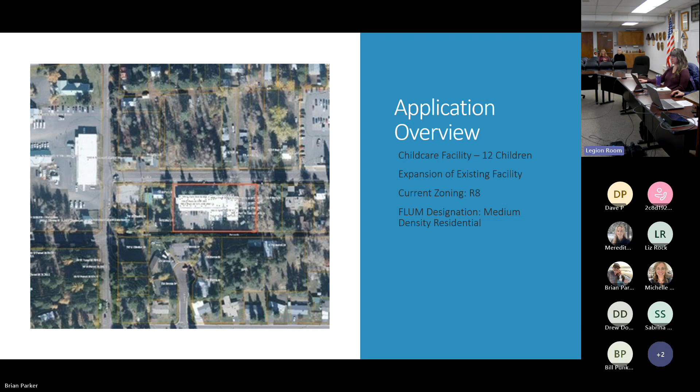So in the R8 zone, childcare center is identified as a conditional use. There is specific language in the comprehensive plan, particularly in the housing section, for providing additional childcare facilities. There is no change to the site or existing structure proposed at this time. Therefore, it is likely to be harmonious with the neighborhood. It needs to be not detrimental to health, safety, general welfare. Again, nothing indicates that there will be detrimental effects.

No substantial environmental consequences to land or waters within planning jurisdiction. There's nothing indicating any environmental consequences since they're not doing any work. Not create excessive additional public costs for public facilities and services, and will not be detrimental to economic welfare of the community. There is no public cost addition anticipated. Be adequately served by essential public facilities and services, which it already is. Not involve uses, activities, or processing materials that will cause unreasonable production of traffic, noise, smoke, fumes, glare, odors, or other forms of pollution. It may create a little additional traffic due to additional children being picked up, maybe a little more noise with more children in the area, but that's about it.